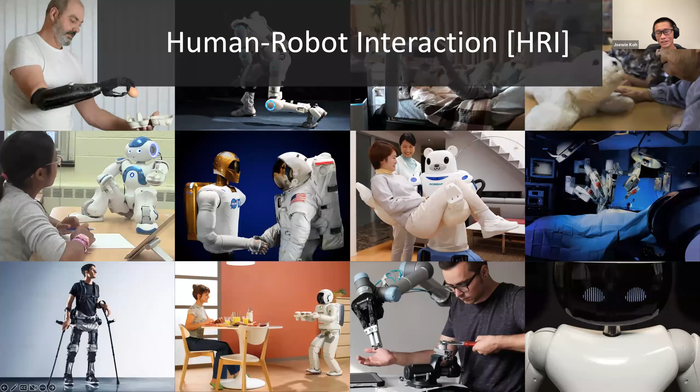So our work is in human-robot interaction, which broadly speaking deals with the issue of integrating robots in human-populated environments. And the reason for which one may want to do that is that robots can be really helpful to people, right? They can provide support, assistance, physically, socially, or cognitively. They can perform dangerous, repetitive, or tiresome tasks. They can augment our physical or cognitive capabilities, and that's great, right?

What we think is particularly interesting, though, is that this is also timely, as these objectives are being developed in parallel with broader shifts in how robotics is being researched in academia and then translated to industrial applications. Because it's important to remember that traditionally, robots have been developed to replace people, right? This is the most impactful application of robotics in society. You have big, robust, reliable industrial robots that operate, say, 365 days a year. They can move big stuff and they never break.

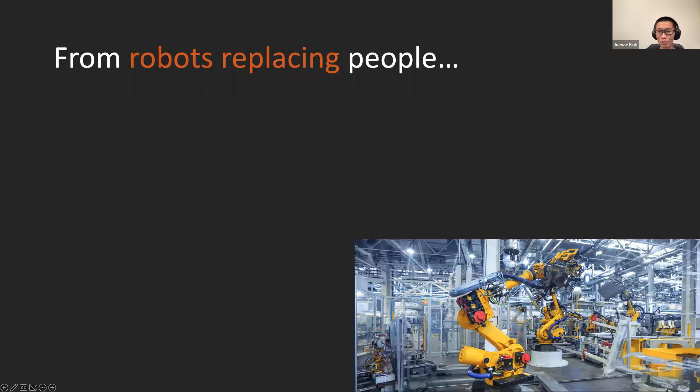However, in the past 20 years, we have started to hit a wall in pursuing this paradigm of full automation. And industrial robotics is beginning to not be directly correlated with increase in productivity, right? The equation has become much more complex. There are plenty of examples of big forward-looking companies that had to revert their approach to industrial automation and introduce humans back into the factory, right? You might have seen these articles about Toyota or Tesla.

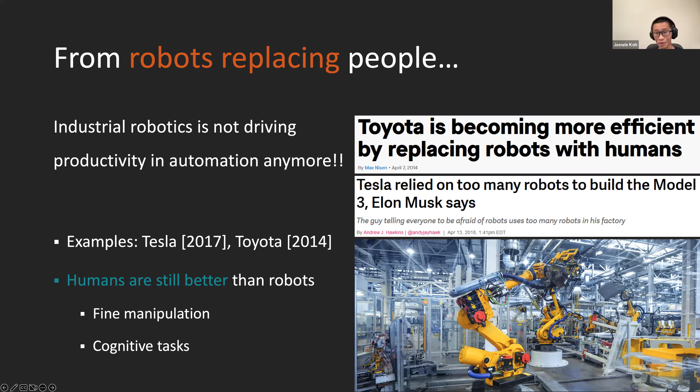And the reason is simple. Well, humans are much better than robots in a variety of different tasks. If you have to do fine manipulation or if you have tasks that involve any cognitive complexity, humans are going to be better. So for this reason, we have recently moved towards a paradigm in which humans are helping robots accomplish complex tasks. Robots are still doing the same things they were doing 20 years ago, and humans augment them with their superior motor, perceptual, and cognitive capabilities. This is better for humans, and this is also better for robots.

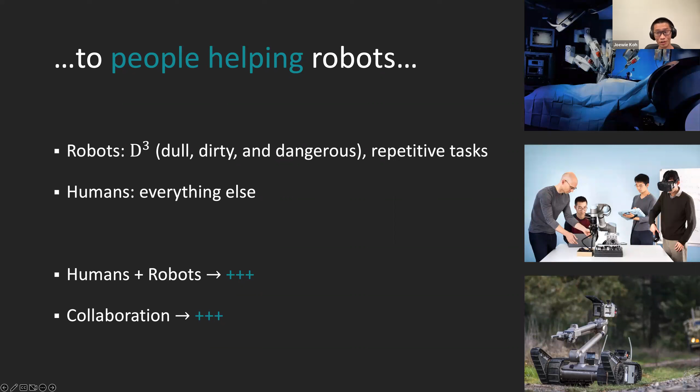But more importantly, it helps seed this idea that humans and robots collaborating together is a clear opportunity for the field. So if robots replacing humans was the past of robotics, then people helping robots is what we can see as the present of robotics. But what everybody is working towards is a future where robots are going to be helping and augmenting humans in a variety of different domains and applications, from logistics, manufacturing, construction, to assistive technologies, healthcare, and finally to the home, right? They're going to deal with untrained people who are not used to being around robots.

They're going to need to perceive and predict people, and they're going to have to interact with people in a natural way. This on one side is a clear societal, economical, and technological need that we see robotics being pulled towards. And on the other hand, it's also an opportunity in terms of moving forward the state of the art in the field to make this vision of robots helping people materialize.

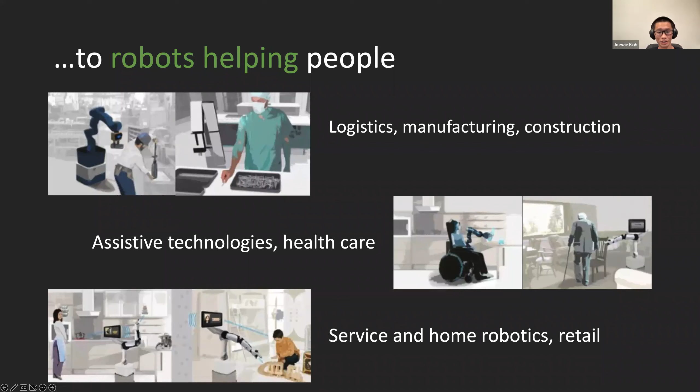So this is the work that we do here in the HIRO group, obviously in collaboration with other people within CU, outside of CU, and within the broader community. We have this strong objective to work towards, and we sit on top of the state of the art in robotics, machine learning, AI, and human-robot interaction, right? And we're working to get there. We believe that we're going to get there by looking at robotics and HRI as a system science, and in particular by investigating three fundamental and partially overlapping problems in the field.

These three problems also constitute the research strands within our group. So I'm going to be talking about this a little bit more in the rest of the presentation. But the first is working on robots that are safe. The second is working on robots that are performing in complex environments. And the last on robots that are better teammates for people.

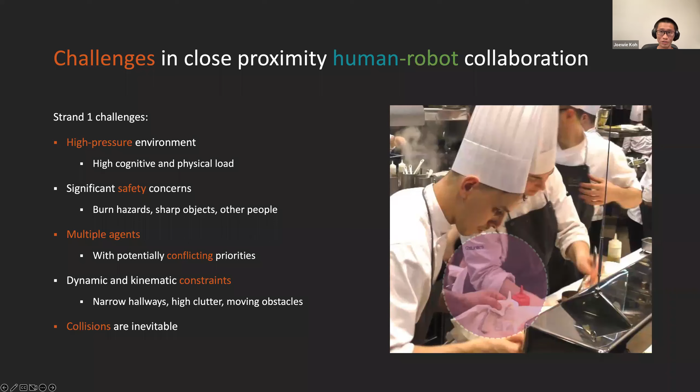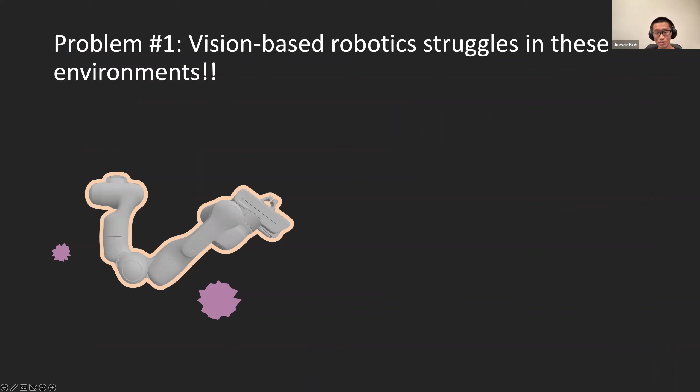For the purposes of strand 1, this is a perceptual problem. Robots cannot perceive humans and other obstacles with the precision and speed that is needed to perform in these environments. So the traditional method of having some external vision sensor, say a camera, suffers from the limitation of occlusion, right? The robot's own body and maybe even other objects in the environment can occlude its vision system, and it doesn't have a full view of what's happening in the scene.

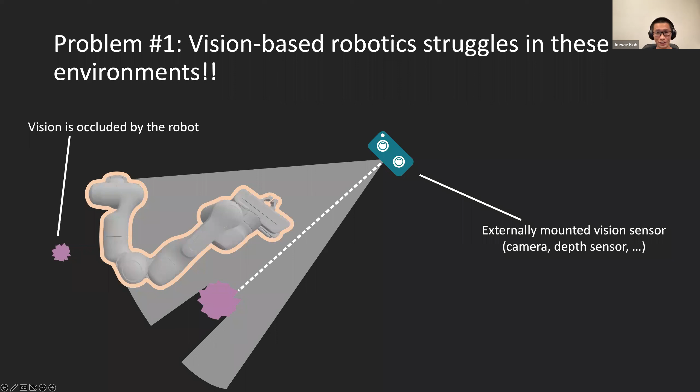To solve this, we can look at humans and see how they perceive the space surrounding their bodies. So one important difference is that humans can sense the environment through onboard sensing, right? And onboard sensors do not suffer from occlusions. So what do I mean by this? Onboard sensing can provide complementary information to vision. So you can integrate this with your existing vision systems. And inspired by the concept of peri-personal space in humans, we can use both proximity and touch to allow us to robustly cover the spectrum between, say, contact at arm's length and contact itself. Right.

So on this topic of onboard sensors, there are some of us in the group who have developed a robotic skin for bidirectional touch-centered human-robot collaboration in close proximity. So the skin contains various sensors. There are inertial measurement units, proximity sensors, contact sensors, pressure sensors, and so on.

Another direction that we have taken this in is in collision anticipation. So in close proximity human-robot collaboration, collision can be inevitable, right? Humans are very fast, and they can be very difficult to decipher. It can also be the case that the constraints in the environment make it such that avoiding collision is impossible, right? So consider this paradigm shift. Instead of insisting on safety at all costs, what if we just ensure that any contact that we have is safe? And maybe instead of avoiding collisions, maybe we can just anticipate them and act accordingly, right?

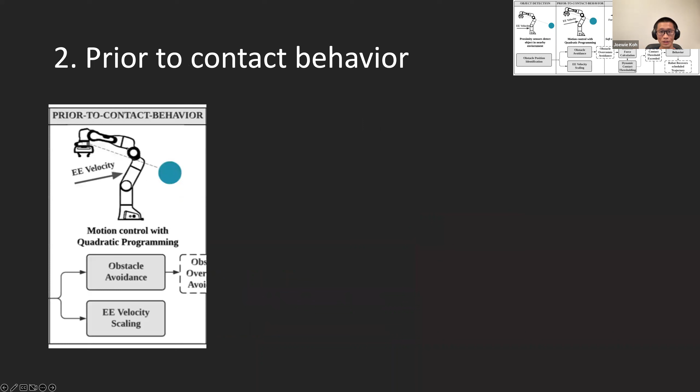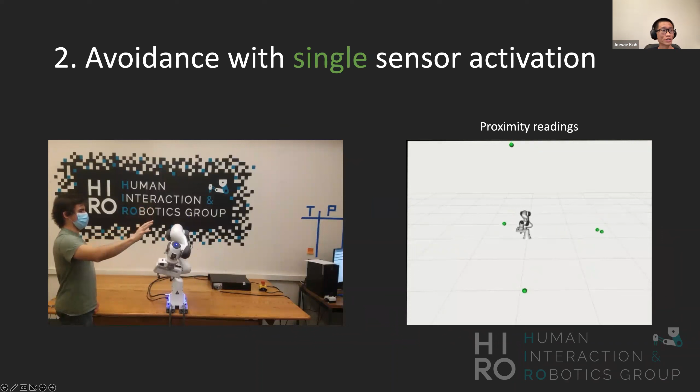So there's a bunch of math that I'm not going to talk about today. Instead, what I want to do is to show you a video. So that's Caleb interacting with our robot. And with a single sensor activation, you can see that the robot is able to avoid contact.

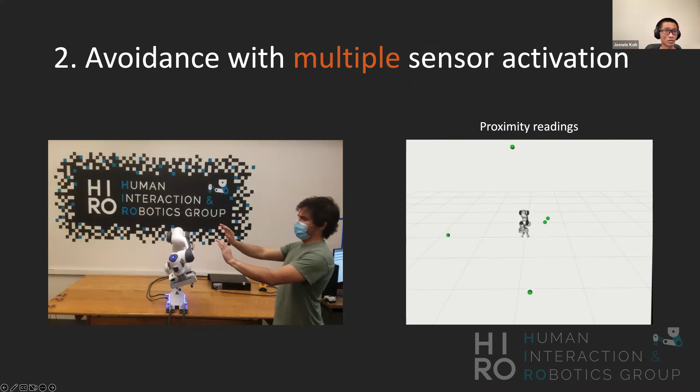Right. And with multiple sensor activations, and yeah, the visualization on the right is the proximity readings that the robot is detecting. So you can see the green balls being the closest object.

So again, I'm going to not go into this in too much detail and jump towards the post-contact behavior. So what we want from this is that if we have better whole body awareness with the robot, we can have better post-contact behavior, right? So one more video. So you can see how the robot is reacting to contact, right? It is not just avoiding contact, it is responding to it.

So in summary for strand 1, and particularly in this work, perception in close proximity grants robots new capabilities. If we can, we avoid contact. Otherwise, you can reduce the force of contact and then try to resume the task. And this really enables a paradigm shift in this space. You can have controllers that gracefully fail and so on.

So now let's look at the second strand, which is focused on robotics proper. And it looks at improving the state of the art of robotics for these complex environments. Human populated environments are complex, right? So if we go back to this professional kitchen scenario, we can clearly see that we are way better than robots, right? Humans are better than robots in this scenario because we have better hardware.

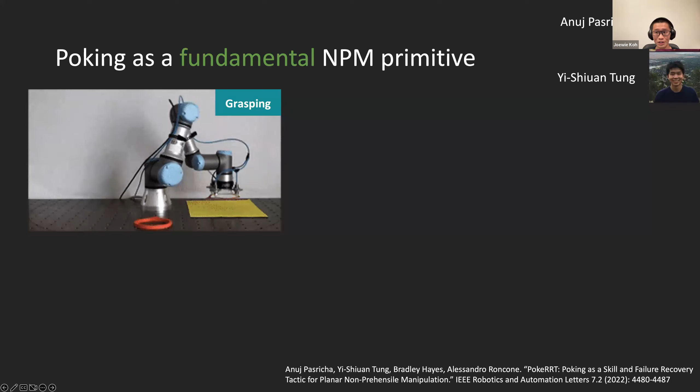However, if we were to deploy robots in these complex environments, it would be particularly interesting because it will increase the portfolio of capabilities at the robot's disposal. So for this reason, Anuj together with Yi-Shiuan, both PhD students in the group, set off to explore this space, more specifically to investigate the hypothesis that among the various non-prehensile manipulation primitives, poking is the most fundamental and complementary to grasping.

One limitation of grasping is that it's limited by robot reach and complementary object and gripper properties, right? For the most investigated non-prehensile manipulation primitive, NPM primitive, which is pushing, we are still limited by the robot's reach, but also by the manipulation speed. On the other hand, poking is not limited by robot reach, right? You can poke something further away than your robot can reach itself. It allows for faster manipulation, and it does not impose strong restrictions on object properties, right? Even if your object doesn't fit within the robot gripper, that's fine.

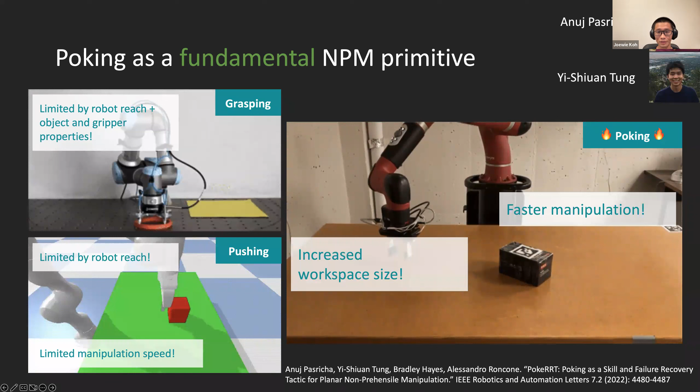So to investigate this hypothesis, Anuj formalized poking and its control method in the following way. We have an object at rest on a planar support surface. A contour point is chosen and extended in the normal direction away from the object. The end effector will then execute velocity control from this point to the target contour point to send the object in free sliding motion until it comes to a stop due to friction.

Right. And so based on this formalization of the poking primitive, they created an RRT-based algorithm that combines this control method with sampling-based planning in an action-oriented approach, which means that we only plan the physical pokes, and all the nodes in the planning graph are achievable configurations. These valid actions are generated in a PyBullet-based physics engine, which is desirable since inverse modeling of frictional contact and object motion can be intractable, or may not guarantee feasible robot motion.

So the integration of valid poking-specific control inputs to RRT ensures that all nodes in the planning graph are achievable configurations, right? While the algorithm ensures exploration bias with the largest coverage. And then they use a modification of the RRT algorithm that decouples skill modeling and object path planning to allow for the evaluation of multiple skill models, which can directly improve planning outcome.

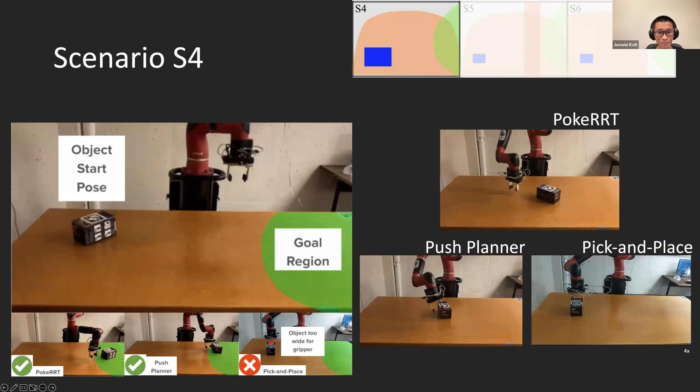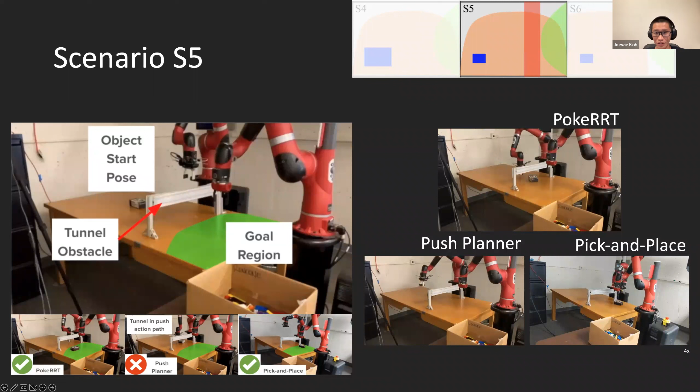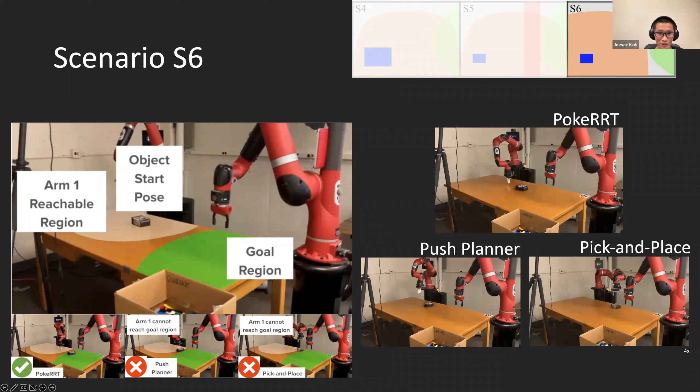So scenario 6, we have non-overlapping workspace, and that causes both grasping and pushing to fail. But poking still works if you have impulses that are high enough to get the object across the workspace boundary. So you're basically pushing the object really hard so that it gets across into the other robot's workspace.

So in the real world, they managed to confirm the simulation findings. They do find that the task times are higher because the simulation doesn't capture sensor noise and other non-linearities that are due to contact dynamics between the robot and object, or between the object and table. And as a result, more replanning is required.

So pick and place always succeeds in scenarios 1, 2, 3, and 5 because there's no uncertainty in the object pose. So manipulation basically boils down to just moving to a predefined grasp configuration and then moving to the goal location, right? But this is not the case in the real world.

A fundamental difference with grasping is that sensing uncertainty leads to total failure in grasping. Whereas for poking, even if you don't have perfect sensing, you can still poke. You just have some partial failure that you have to replan for on the fly.

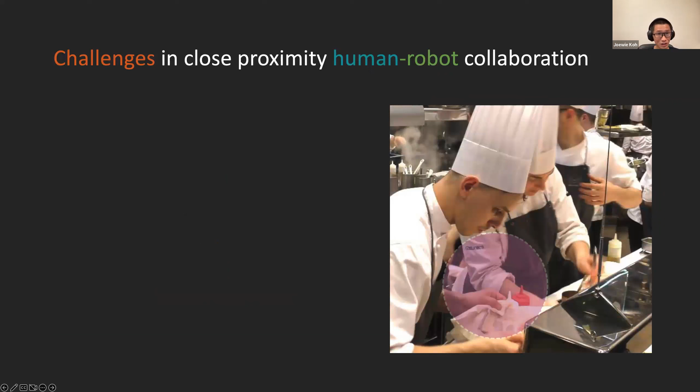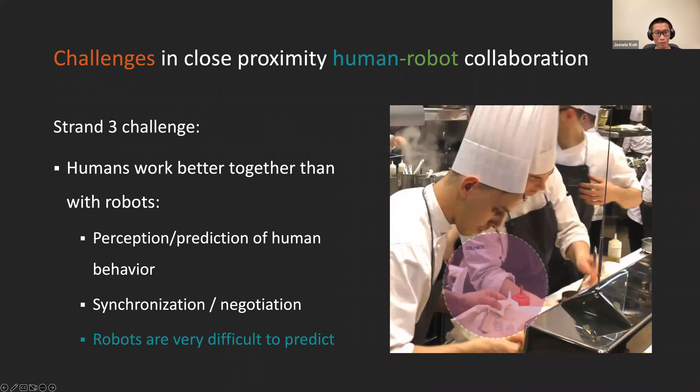So in Strand 3, the challenge is that, well, humans work better together with each other than with robots, right? We are better at perceiving and predicting the behaviors of other humans, or in synchronizing and negotiating with each other than with robots, right? You can't negotiate with robots quite as easily as with other humans.

Pattern recognition has been honed by millions of years of evolution, right? Our ability to recognize a face in, say, a tree or in toast is pattern recognition. And we will apply patterns even when there's no pattern, right? So powerful is our sense of pattern recognition. And these are examples of visual pattern recognition, but the same principle applies elsewhere. And the question we want to ask is, can making use of these pattern-like behaviors make for better robot teammates?

So there's this experimental setup. The human and robot simultaneously select a block by color and shape, and they do so secretly from their partner. If the color and shape match, the team receives the reward, and the robot removes the block from the board. If the team fails to coordinate, then there's a penalty and the team tries again.

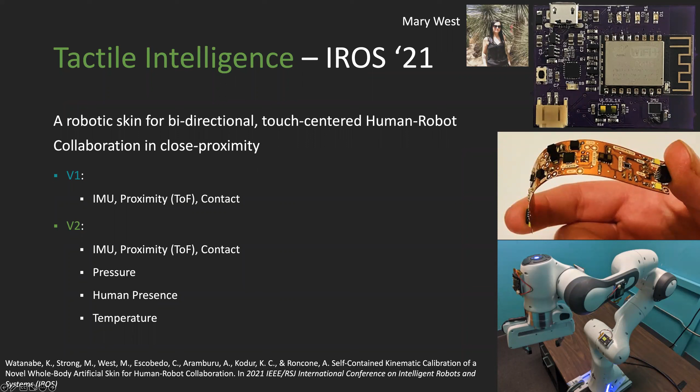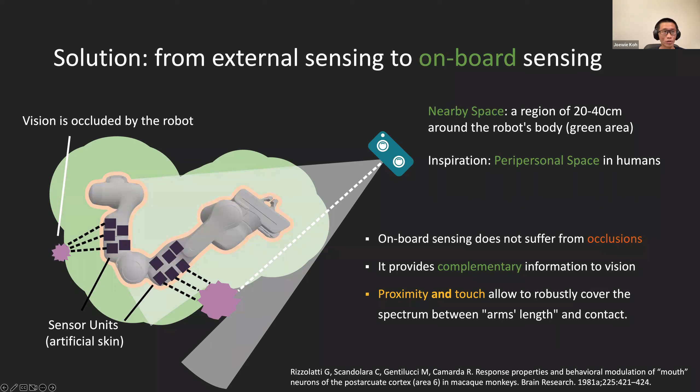Okay, so you're not actually using any vision information in this case? Right, the vision information will be from the external cameras. It's hard to put cameras on the robot's skin, because it's hard to parse what's happening from those cameras. So the cameras are still external, and they work complementarily with this robotic skin that contains the sensors we just saw.

Okay, so are you doing any sort of prediction of whether a collision might occur, or are you just detecting when the collision is happening? They are predicting whether collisions might occur and then trying to avoid them if possible. Because if you recall, they have this 4-step process, right? Yeah.